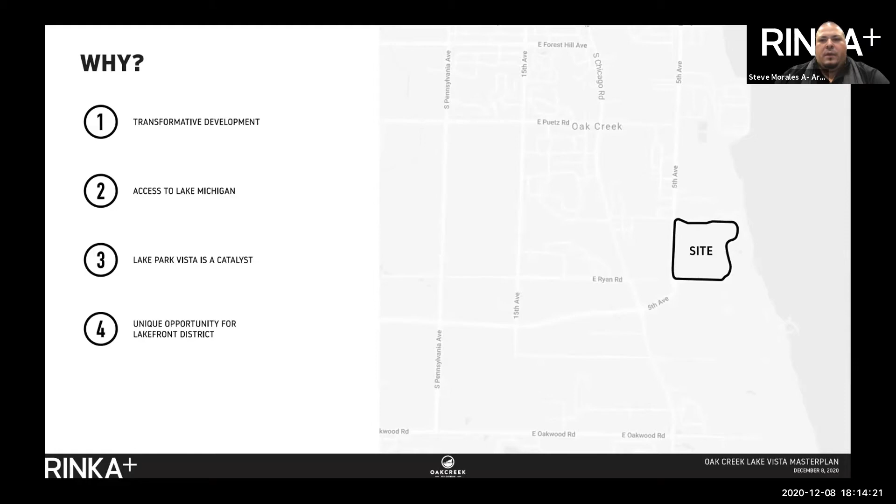So some of the initial questions we ask ourselves is why. And there are some very clear ideas here that it's a very transformative development. It certainly has amazing access to Lake Michigan, and the Lake Park Vista has always been a kind of catalytic project for the city. It's also a very unique opportunity for the lakefront area itself, and we're very excited to answer some of those why questions through design.

As we start to understand that opportunity, we really have to, as I mentioned, ground this project in research. Some of the most staggering research we found is that families in general have gotten a lot smaller, but the houses have gotten a lot bigger, and with that have become far more expensive. So one of the ideas here is understanding those barriers and how we start to solve some of them during design.

The research included four avenues of looking at things: studying other developments that have done similar things across the country, modern housing movements in general to understand the best approach toward residential development, future forward transportation to understand how the world works today from a transportation perspective and in the future, and understanding the value of amenities and recreational opportunities in this development.

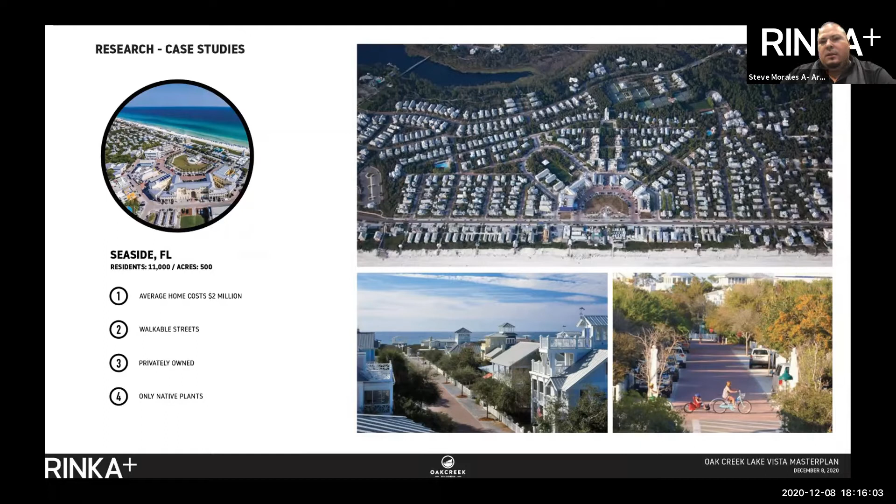When we look at some of these developments in the past, we look at case studies like Seaside, Florida, which started off with a great vision and mantra to try to develop an ideal community, but unfortunately has gone the way of not being very accessible. We learn from some of the mistakes that developments like this have had when trying to solve the problems we look for in new residential development.

Certainly Bainbridge Island developed in a very different way, focused on the idea of intergenerational living, going back to those community-focused ways of growing up in a neighborhood.

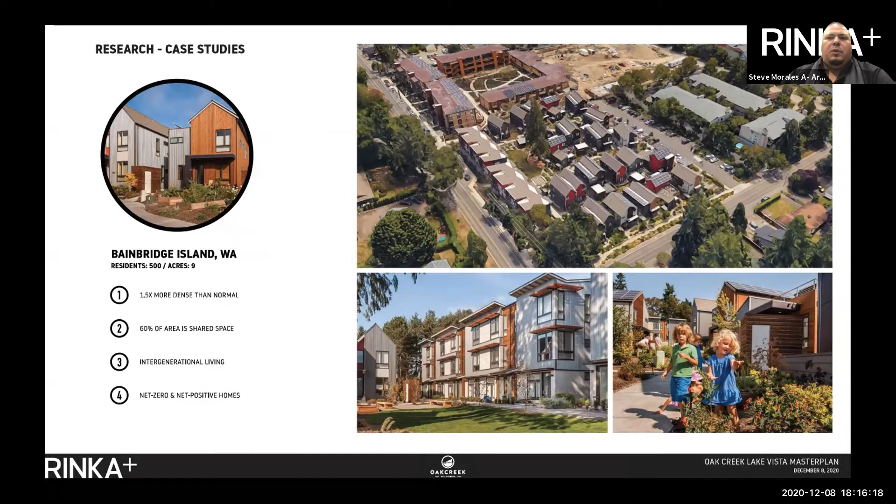We also look at large scale developments like Mueller in Austin, Texas, a former airport site with a lot of acreage, which took a different approach with more diverse housing typologies, and a focus on amenities with residents living less than 600 feet from green space, creating a highly functioning new development.

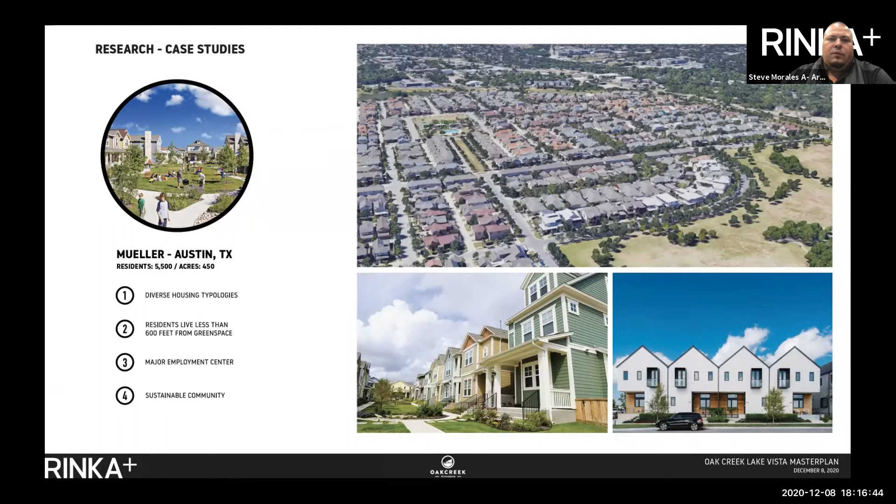Similar to that, Stapleton in Denver, another large industrial conversion site, again very similar in diverse housing typologies, extremely pedestrian friendly because of its scale, able to bring in mixed use components, and with more of those urban characteristics that really make a neighborhood feel connected.

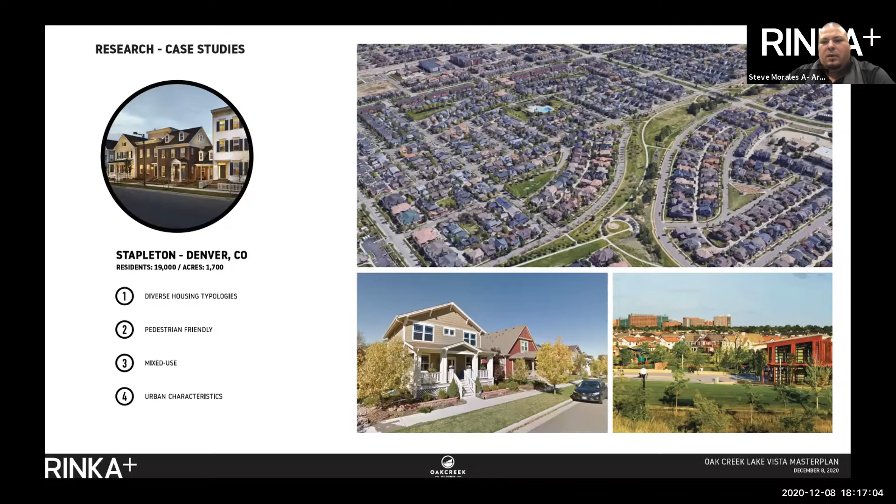Looking across all of those, you find a direction to increase the amount of green and amenity space in neighborhoods, focused on shared amenities and spaces between community members. It's very pedestrian focused, with a lot of diversity in housing typologies and offerings—it isn't one type of living situation. All of them start with diverse goals and common design elements that give the place a certain character.

Understanding some of the modern housing movements, looking at things like co-housing, prefabricated design, and smart homes, it's good to understand how modern families of different shapes and sizes start to live together in neighborhoods and understand the life cycle of families.

Prefabrication brings economy of scale to a construction typology, helping drive costs as low as possible to make the development as accessible as it can be. Smart home and sustainability ideas will help make these homes sustainable over the long term—true sustainability is really the long-lasting nature of neighborhoods and homes—providing benefits from a cost perspective, and convenience and technology for residents.

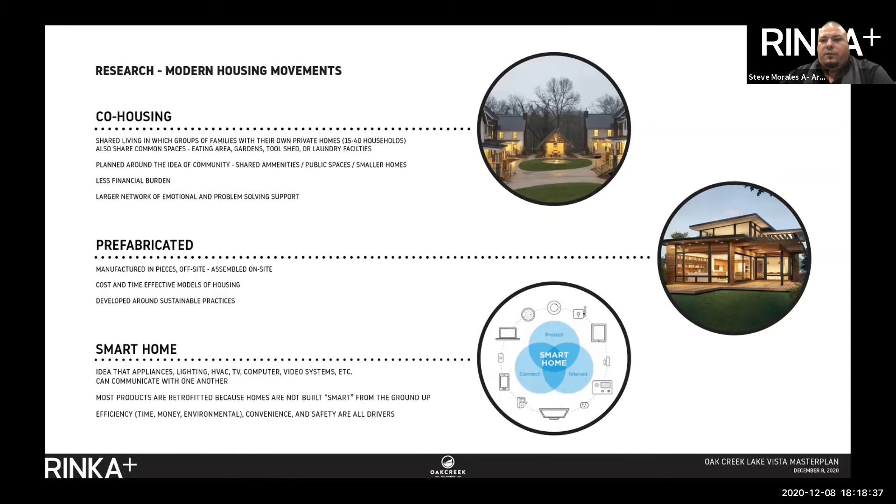Also thinking about transportation and the future of it—understanding walkability and how the current situation keeps us a very destinational environment in this part of the country. There are opportunities to increase pedestrian connectivity, put a focus on walkability and transit orientation, and bikeability aspects of development—a key focus for us to make sure we don't generate ideas that are very car dependent.

Also looking at amenities as well, looking across all those various case studies, understanding the amount of focus that's been placed on them became really a big driver for us here as we look to design to solve some of those problems.

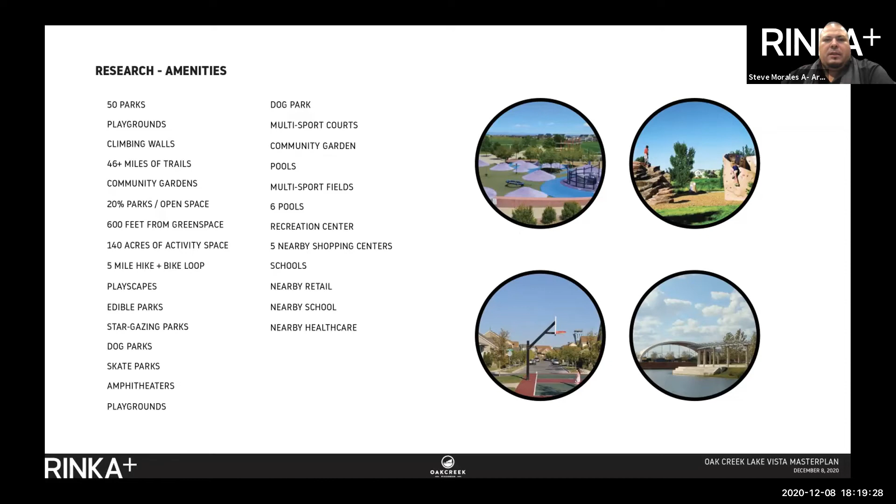In summary, the case studies really focused on a lot of shared spaces and interactive opportunities, certainly amenities, the modern housing movements, thinking about more of a community focus, creating opportunities for sustainability and efficiency, and decreasing financial burden when you look at economies of scale. Future forward transportation, certainly walkability, micromobility, and autonomous vehicles being considered in the future, something we can't ignore as we look ahead. And amenities and recreation, really understanding that for a community to be vibrant and become a neighborhood, it has to have access to green space, ample opportunities for diverse activities, intergenerational opportunities, and a focus on the whole community aspect.

We can't ignore the fact that there are a lot of experts in the world looking at how these get developed, and certainly the gold standard of that is Tracy Cross. We engaged a market study with all the various stakeholders involved, and the highlights are that it's really a great location. There can certainly be great absorption, so there's a need for more doors in the community, up to 660 per this report, with great absorption over time, and it supported the idea of various diverse housing typologies to make sure there was a good offering for residents who wanted to join your municipality as part of the development.

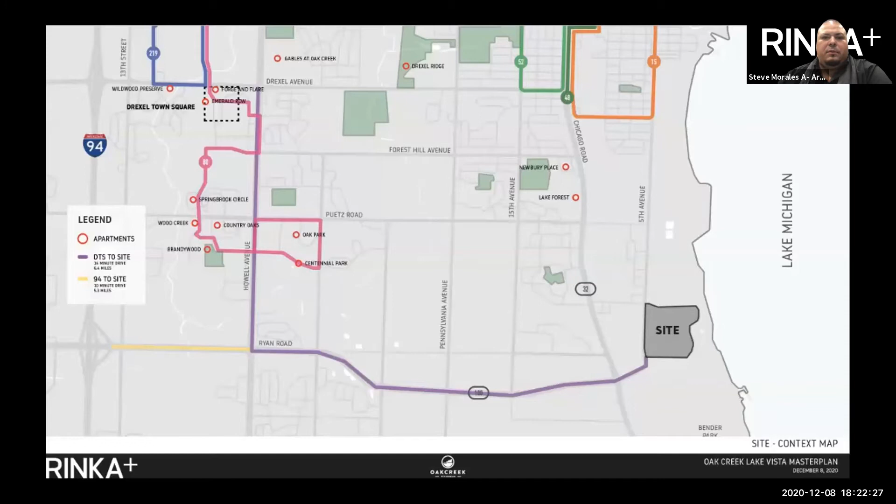Zooming in here a little bit, Lake Vista Park, obviously a great catalytic project that created a great opportunity for the city to have access to Lake Michigan directly. The areas in yellow really being the areas we're talking about today as part of the design solution we're proposing here today. If we look at the area in yellow, it's a fairly large site to start to dissect and get into.

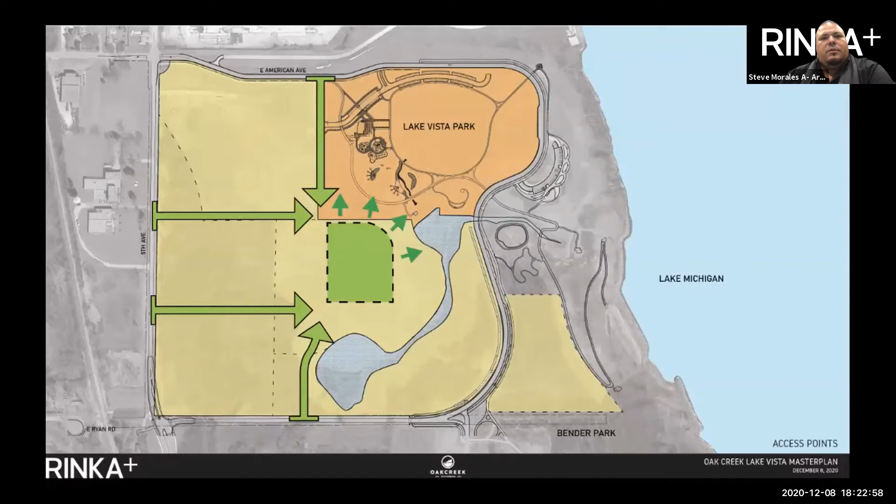Where we typically start is trying to create very logistical, feasible, and economic ways to get into the site that makes sense, creating some great major access points, understanding that getting to the center of the site and connecting to the center of Lake Vista Park is one of the goals, to understand how this could start to drive layout for the balance of the planning.

As we start to look at how we can subdivide those areas in between the major access points, we start to think through how residents could experience this neighborhood, walking out of your front door, being able to turn right or left and see those great vistas out over the park onto Lake Michigan, which helped us orient the blocks on the west side of this planning effort from west to east, as well as in the southeast portion of the bottom right corner, orienting some of those homes out to Lake Michigan.

What we then talk about is those amenity-rich opportunities: the connection, the pedestrian connectivity, the walkability, and the green lines that you see from this last slide here to this one start to show a very intentional connection throughout the site, through the neighborhoods themselves, and around to a bigger network of walking areas, trails, and paths that connect back over to Lake Vista Park, directly to Lake Michigan, to the bluff there, and to the perimeter, and eventual future extension of the Oak Leaf Trail up in the top left corner, and a variety of other methodologies to make it a very well-connected site.

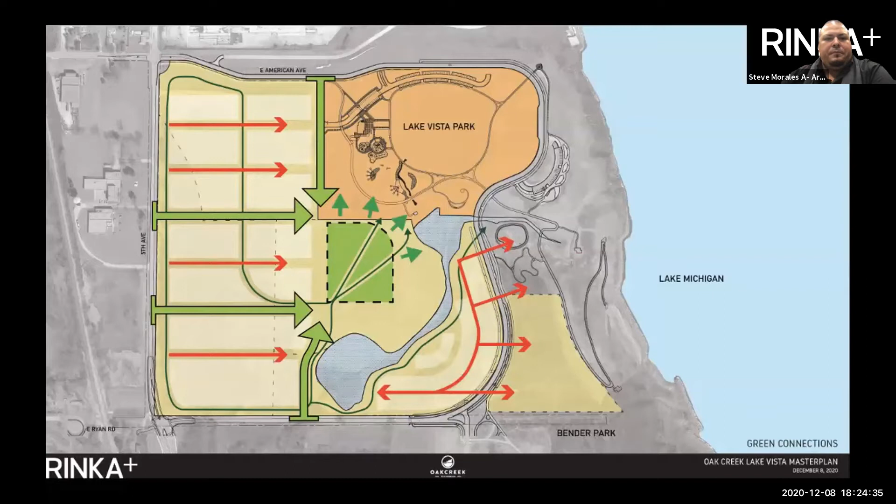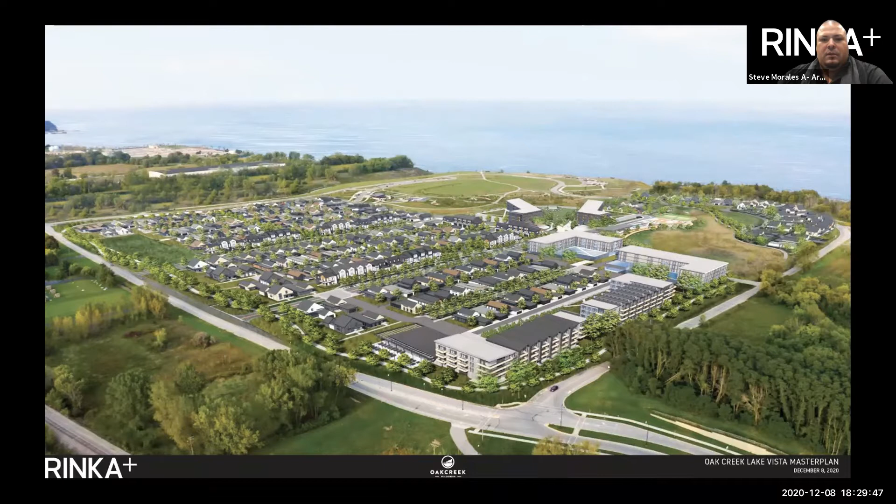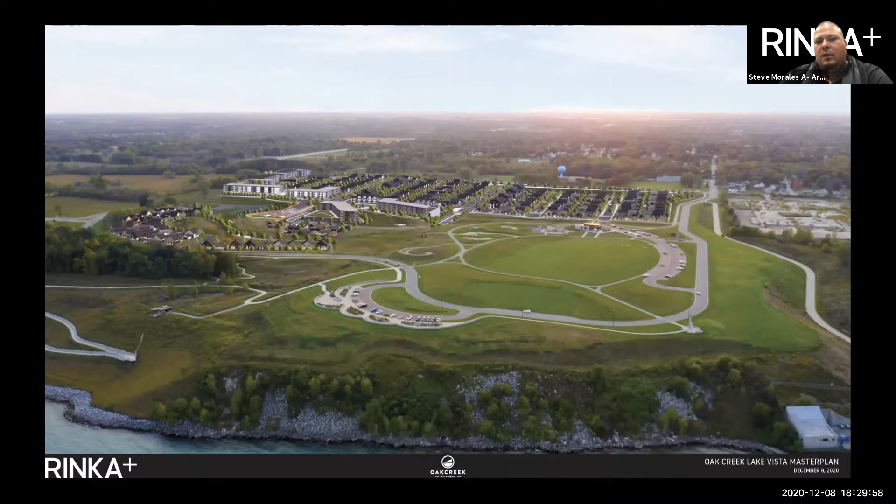With that, a few images that you will have seen in the animation I played, some overall shots here. Here we're in the southwest corner of the development site, over the top of the neighborhood. A view back over the waters of Lake Michigan, looking back towards the development with Lake Vista Park in the foreground. Some of the green spaces, the amenity-rich areas here that are within the development and accessible to the public as well as the residents.

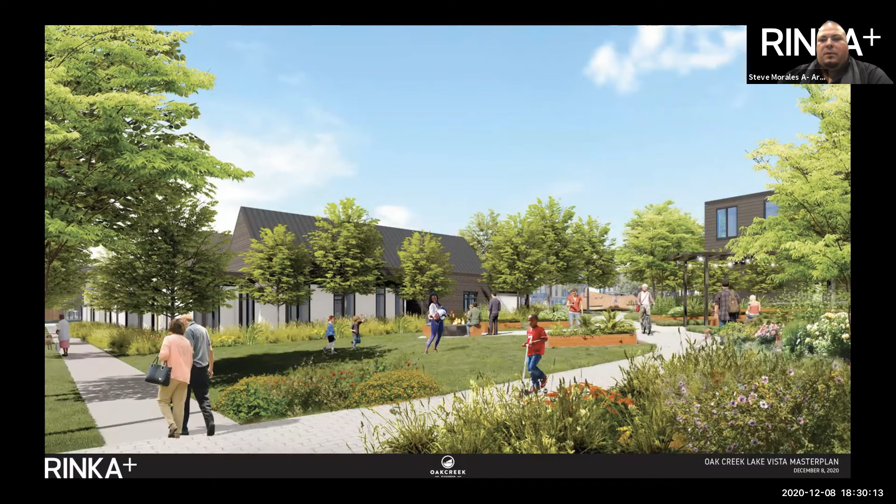And here an image of the spine that really runs through the center of the neighborhoods, showing some of those communal areas that will be accessible and available for the community to enjoy, gather, and be around each other.

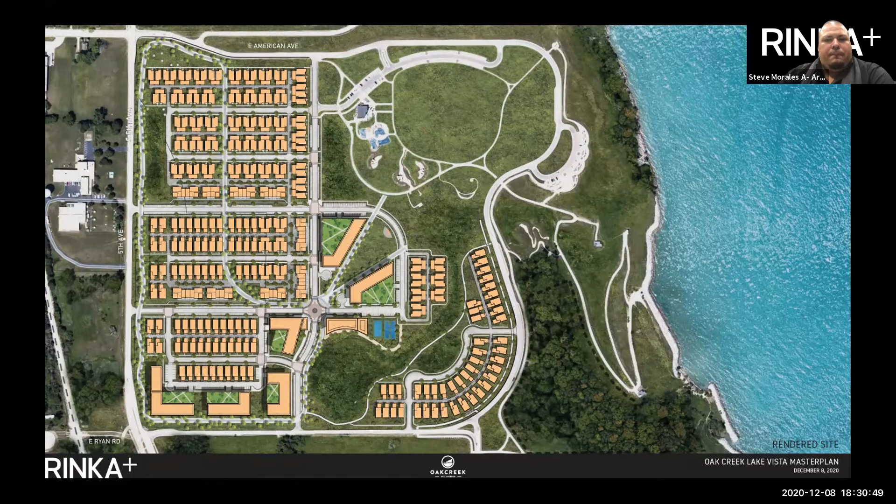And then lastly, the overall site plan that I showed earlier in the presentation, to get an overview here, as well as the previous breakdown of the site. I'll flip back to this image, and at this point, Larry, if you're on the call, if you could share with the group some of the great success story of the development, we'd be delighted.

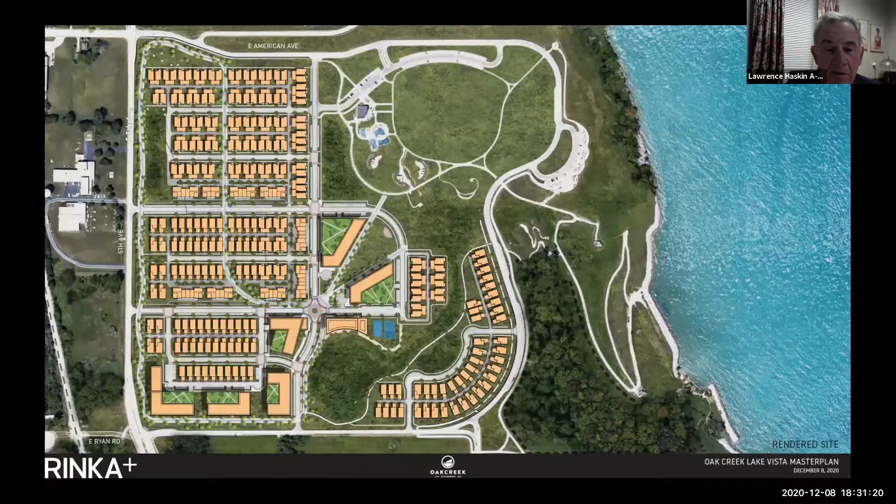Sure, I'd be happy to do that. Mayor, my name is Lawrence Haskin, 7300 South 13th Street, Oak Creek. I served as the city attorney for Oak Creek from 1985 to 2015, and have been working with Andrew and his team over the last several years on all matters with regard to the lakefront, particularly this development.

Let me start out by saying the city's really enjoyed a tremendous partnership with F Street, with Scott Lurie, and with Rinka Architects. We've done a lot of work with Rinka in the past, particularly on Drexel Town Square, and they've had a tremendous impact on what's happened here over the last decade in the city of Oak Creek.

This is obviously, as you can see, a transformational project. It's going to be a game changer for the city and for the lakefront. But it's even more compelling when you consider the history of this property. It's really a tremendous story of taking previously contaminated property and, through partnership with the DNR and the previous property owners, and now with F Street and with Rinka, turning it into a tremendous redevelopment.

So just historically, over 100 years ago, Newport Chemical built a huge chemical complex, a number of different factory buildings, on the site of what is now Lake Vista Park. They built and operated that at a time when there was no DNR and no EPA. So whatever the byproducts were from the chemical operations just went back into the land, whether that was barrels or residue from the manufacturing operations. So there was no environmental oversight.

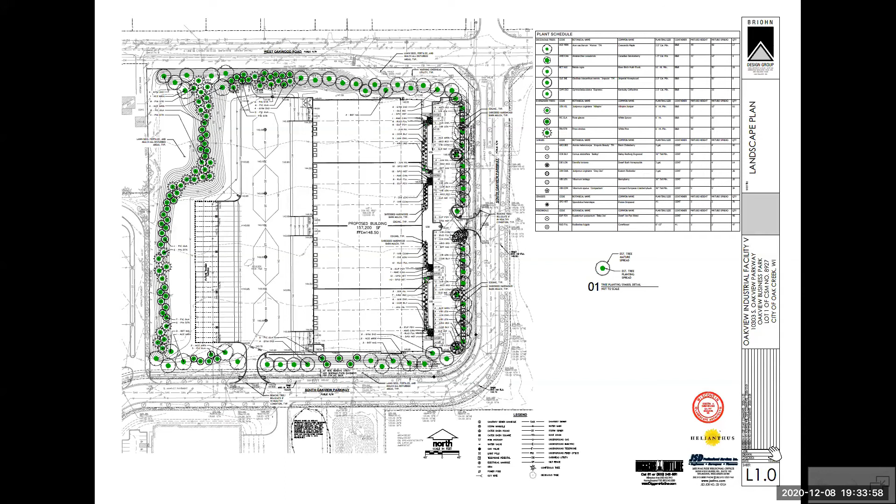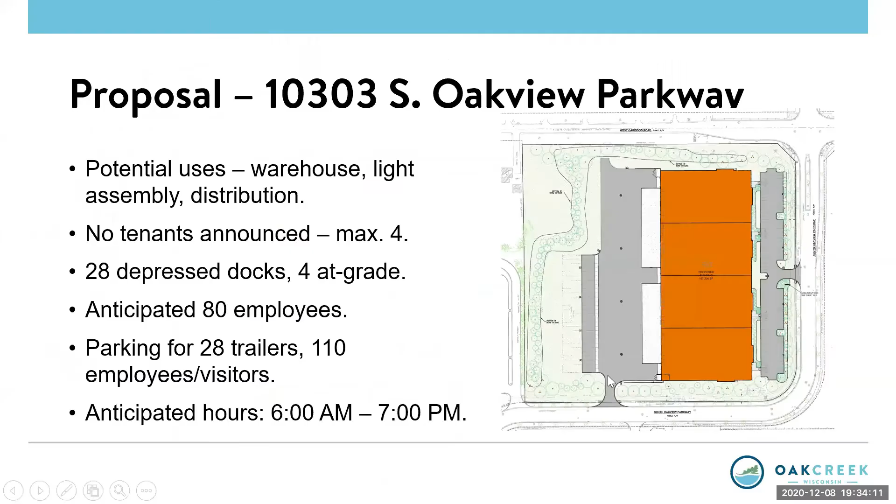Okay, with that we'll look for a motion, please. Seifert moves that the Planning Commission recommends that the Common Council adopt the conditions and restrictions as part of the conditional use permit for freight yard, freight terminal, transshipment depot facility within the multi-tenant building on the property at 10303 South Oakview Parkway.

Loreck seconds. Roll call. Hannah, aye. Sullivan, aye. Grillo, aye. Lorik, aye. Kavich, aye. Guzikowski, aye. Oldani, aye. Seifert, aye. Chandler, aye. Great.

Thank you very much to the Dickmans. Thank you for working with the residents. Residents, thank you for speaking up. We always need that input, and it's not always the easiest conversation, but it is helpful. So thank you very much.

Item 5C is a request for a rezone for the property at 7140 South 13th from RS3 single family residential to B4 highway business, with no change to the floodway.

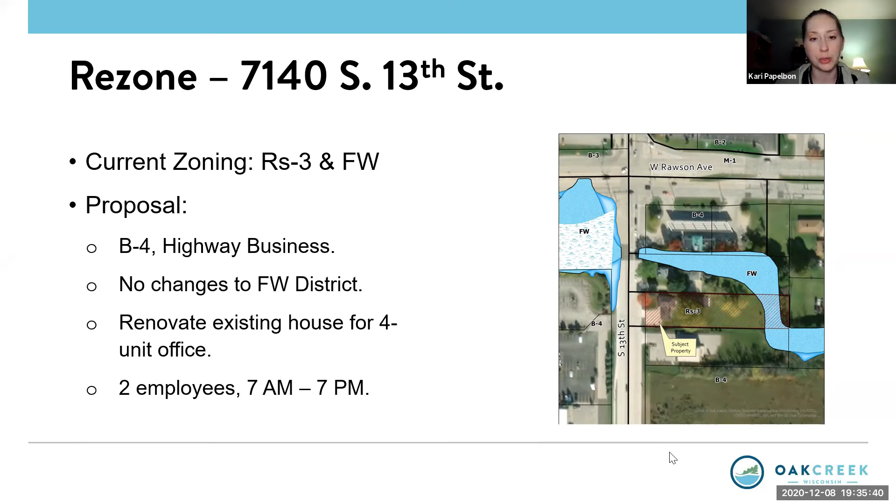Kari: Thank you, Mr. Mayor. The request is to rezone the property, and there are no changes proposed to the floodway, so thank you for mentioning it. There is an existing home on that property, and while the request is just for a rezone, it doesn't have anything to do with the use itself. There are some details provided by the applicant for what the proposal would include for reuse of the property. They want to renovate the existing home for a 4-unit office building. Right now they have 2 employees slated to work 7 a.m. to 7 p.m. on the property.

If we turn to the comprehensive plan and what it says for this area, you can see the majority of this area is in red, which is for commercial use. This is one of the last remaining residential properties anticipated for future commercial use in this area, so rezoning the property is in line with the comprehensive plan. As you can see, the parcels in the area are also zoned for commercial: B4 with a conditional use, B4, and a PUD. In the extended area, the zoning goes to B3 and B2 to the north, M1 to the east, B3 and I1 to the south-southwest. So the majority of properties in this area are slated to be commercial, which is in keeping with the area as well as the comprehensive plan.

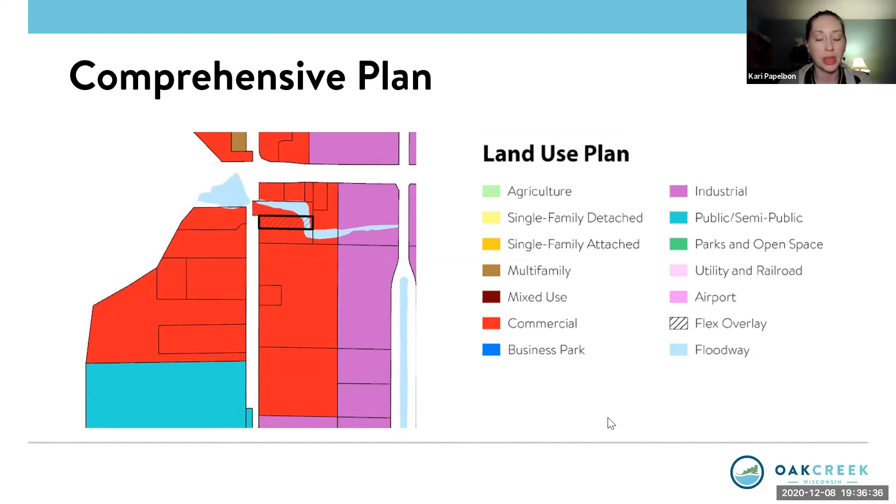So even though, this is just for the rezone, rezoning does not preclude the applicant from obtaining any future reviews that may be required based on the specifics of the use of the property, including site and building plan review for any change to the property itself or the building exterior, sign permits, and things of that nature. So with that, there is a suggested motion for approval on the screen.

Mr. Mayor, thank you, Kari. Kevin, is there a resident wishing to weigh in or provide a comment? There is no one on for this item.

Okay, Commissioners, we'll start with Commissioner Chandler, any questions? No questions, thank you. Fred? No comments. Don? No comments. Chris? No comments for me. Greg? No, thank you, no comments. Dawn? Nothing for me. Matt? Nothing. Christine, anything? Nothing here. I have nothing either, so we will go to motion, please.

Oldani moves that the Plan Commission recommends to the Common Council that the property at 7140 South 13th Street be rezoned from RS3 Single Family Residential to B4 Highway Business, with no change to the floodway district, after a public hearing. Seifert seconds. Roll call.

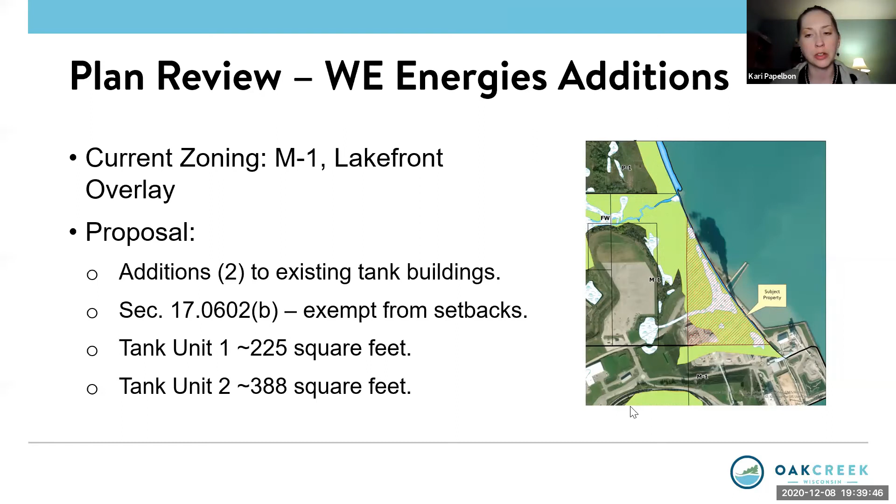The proposal is for two additions to the existing tank buildings. Because this is a utility, they are exempt from setback requirements, which is why there's nothing listed here. Tank unit 1's addition is about 225 square feet, and tank unit 2 is about 388 square feet. We'll get into what those look like in just a moment.

These are the locations. As you can see, it's on the east side of the facility, nothing that'll be viewed from any surrounding properties. You probably won't even notice it if you're out on the lake. The insulated metal panels chosen for the building will match as closely as possible in look and color to the existing facility.

The use of metal panels requires a 3/4 majority approval of the Plan Commission because it's not recommended or allowed as a primary exterior building material in code. But since this is an addition, the Plan Commission does have the authority to make that exception. Due to the location and nature of the additions, landscape plans are not required for this proposal.

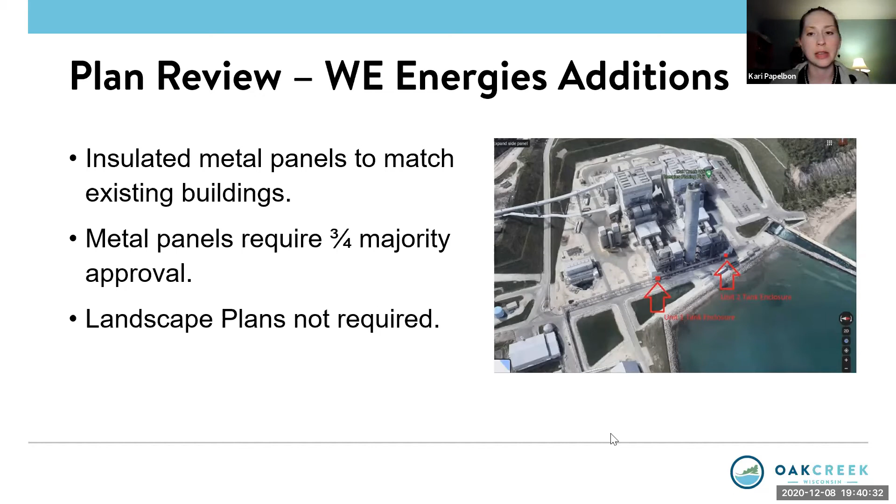Here are the existing facilities with the red outlines where the buildings will go. The elevations show pretty much just a little bump out, which is what the tank facility will look like. You probably won't even notice it, and most people won't ever be in this area to notice it.

Each of the additions will be about 21 feet in height, again on the east side of these buildings, nothing that can be seen from the neighbors. So if there are any questions, we can certainly try to answer those, but there is a suggested motion for approval on the screen for Plan Commission consideration.

Thank you, Kari. Kevin, is there a representative from We Energies that would like to speak? Yep, we have a couple. Rob Steer, the administrator for this project, is raising his hand. Rob, you should be able to speak. We'll need your name and address for the record.

This is Jim Filer with Anderson Ashton. I believe Scott Leonard from the power plant is on, if there's any questions as to the use of the tank building. As explained, metal panels to match — it's a metal roof, small metal building addition for process for the power plant, to house a tank. It's generation station 1 and 2 that need the identical facility.

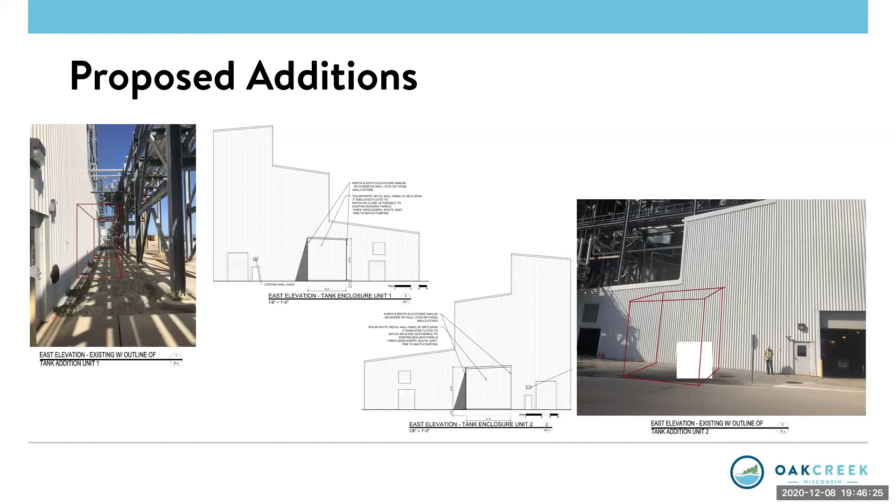Seifert moves that the Planning Commission approves the site and building plan submitted by Pete Segalis, We Energies, for the property at 4801 East Oakwood Road.

Hannah, okay, we have so many. I think Hannah's second, that's what I heard.

But okay, roll call. Hannah, aye. Sullivan, aye. Grillo, aye. Lorik, aye. Gavich, aye. Guzekowski, aye. Oldani, aye. Seifert, aye. Chandler, aye. Okay, thank you very much, guys. Appreciate it.

Item E, Plan Unit Development Amendment. Review a request submitted by John Schluter, Frontline Commercial Real Estate Development, to amend the existing plan unit development to remove the property at 9141 South 13th. Kari?

Thank you, Mr. Mayor. That's actually the entirety of the request. Current zoning is B4 PUD, and there is an existing PUD that affects this property as well as the two properties to the south. A little bit of history for those who recall, whenever we were talking about the comprehensive plan amendment for this property, the PUD was established in Ordinance 805 in 1979 for those three properties. It was last amended January of this year to allow hotels and restaurants on the property at 9315, and to also bring that PUD more in line with current code requirements.

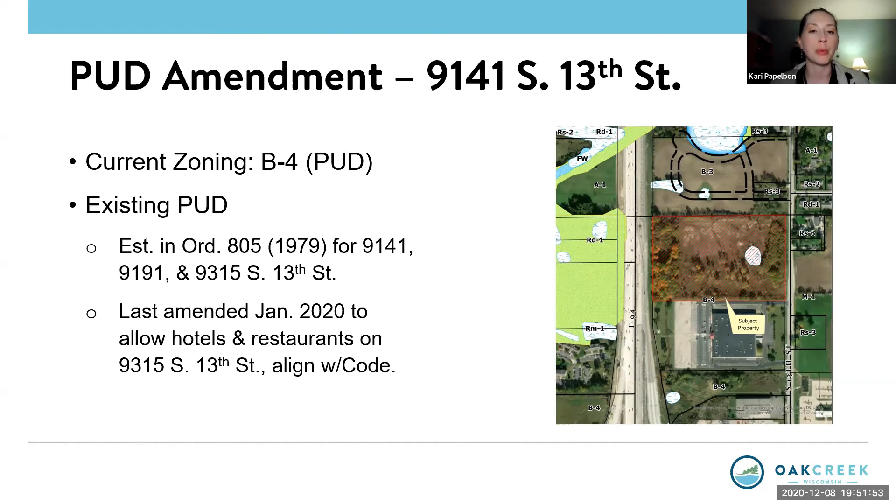So 9315 is the one that was amended to allow hotels and restaurants. But the entire PUD is commercial in nature, it doesn't allow for manufacturing facilities, which is why the request to remove this property from the PUD is before the Plan Commission.

With that, I have no other questions. Thank you, Christine. I do not have any questions myself either, so if there's no further comments, motion.

He moves that Guzikowski makes a motion that the Plan Commission recommends that the Common Council approve the planned unit development amendment, removing the property at 9141 South 13th Street after a public hearing.

Loreck seconds. Roll call. Hannah, aye. Sullivan, aye. Grillo, aye. Lorik, aye. Kavich, aye.

Guzikowski, aye. Sleeper, aye. Chandler, aye. Okay, and that will get us to the connected rezone, as Kari mentioned, and that's a review submitted by John Schluter, Frontline Commercial Real Estate, to rezone that property at 9141 South 13th from B4 Highway Business to M1 Manufacturing.

Kari? Thank you, Mr. Mayor. So again, we are talking about this property, rezoning it to allow for a future multi-tenant industrial building on the property, allowing that in an M1 district.

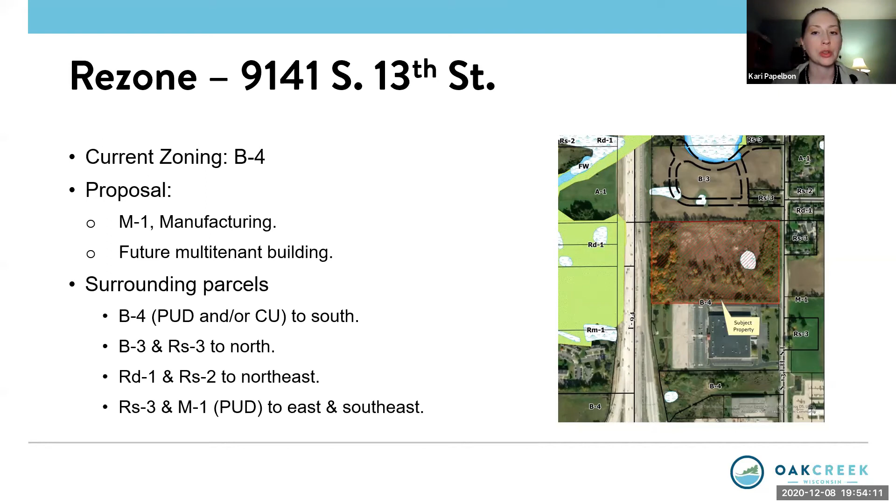So we mentioned that the comprehensive plan was amended to business park in November of this year, and this is a reminder of what the comprehensive plan calls for in terms of business park type uses and developments. Now, the future development, of course, we mentioned reviews would be required for anything that happens on this property, and would allow for permitted uses in the M1 district.

In this case, the proposal would include such things as a manufacturing, fabric manufacturing facility and food distribution. Primary operating hours, even though not part of the rezone, at this point are anticipated to be 7 a.m. to 5:30, although distribution would be outside of those hours and likely 24/7 depending on the tenant needs. There might be a small scale retail or wholesale component as part of one of these uses, probably the manufacturing facility would have that, not sure if any of the other tenant spaces would need it, but it would be allowed in the M1 district.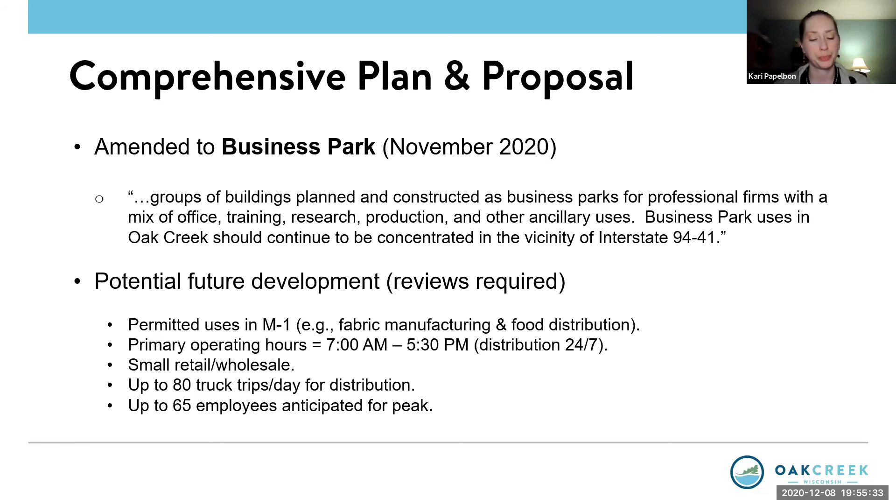Right now, it's anticipated that up to 80 truck trips a day would be seen on the property for the distribution component, and all told, about 65 employees at peak would be anticipated based on these two use categories. That is the information that we have pertaining to the rezone. There is a suggested motion on the screen for commission consideration for approval.

Mr. Mayor. Thank you, Kari. The applicant is available if there are questions. We did have a neighbor sign up as well. Please let the neighbor go. All right, Tom and Denise Abler, you should be able to speak.

Hi, this is Denise Abler at 1230 West York Street. We have been following this since the first request for the rezoning, and I guess I'm a little confused on what is really being proposed and what's going to happen with that property. I know I have spoken not directly to John, but via email, and I did contact our alderman on some concerns about traffic and that type of thing. It's hard to approve of this when you really don't know what's going to go into that property and what it's going to look like. So could John help us out with what he's proposing or planning?

Fair enough, I think that's a fair question. John, are you with us? Can you shed some light and kind of clear that up for Denise? Absolutely. Tom and Denise, good to be talking to you again, and the whole commission. The building will be masonry and glass construction.

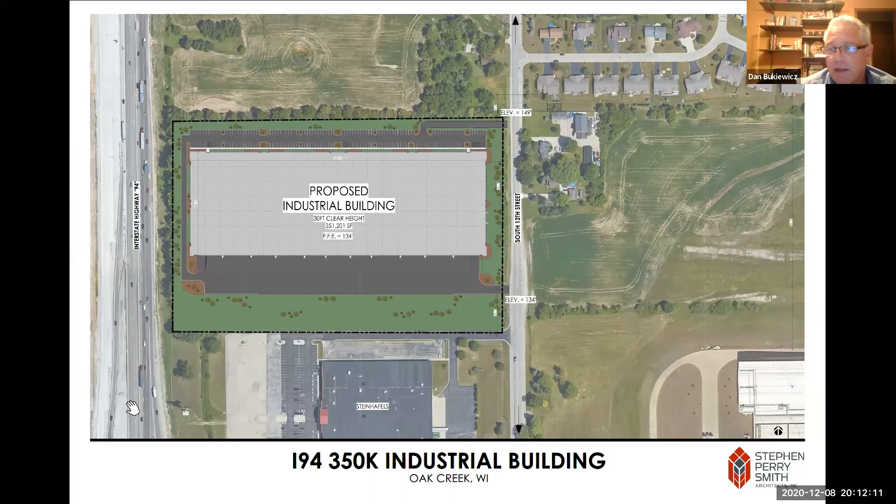Okay, I have no further questions. Thanks, okay Tom. Okay, with that, Denise, if something pops in your head, just give us a jingle. I'll see if the commissioners got any questions, comments. Sure, I appreciate that, thank you.

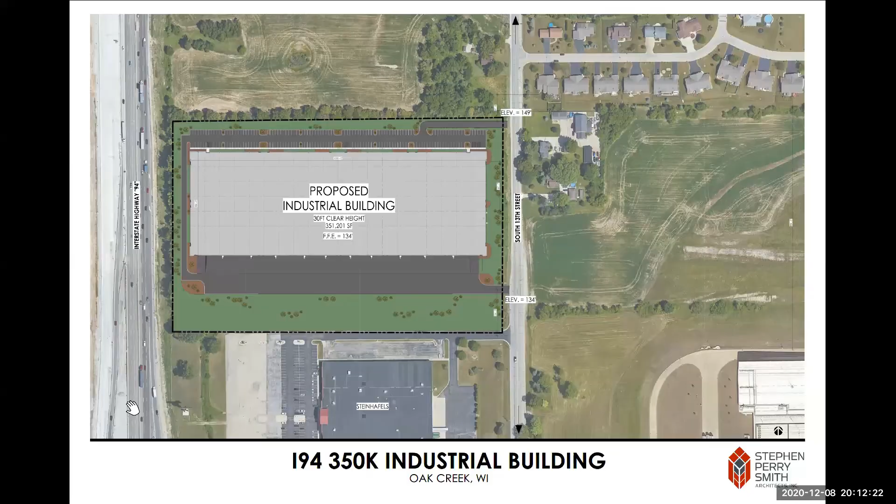Christine, anything? No, nothing here. Thank you, okay thank you. Matt? Nothing in regards to the rezoning, no. Okay, Dawn? Nothing for me. Greg? No, nothing at this time. Thank you, Chris? No, I'm set at this point. Thanks, okay. Don? No questions or comments.

Fred? No comments. Chauncey? I do have a question for the applicant and possibly Kari. Based on the description of the type of manufacturing that will occur here, can you provide more information on whether this should be a light manufacturing rezone versus a manufacturing rezone?

Chauncey, I can kind of answer that. The zoning district allows for this type of use in the M1 district. We did look at LM1 as a consideration, but it does not offer the range of uses that would be seen in this particular development.

Okay, thanks Kari. And just for clarity, a quick question for the applicant: so you're going to be processing or manufacturing fabric, is this correct? That's correct. We convert the fabric from rolls of fabric to what's called Keder, K-E-D-E-R. Nobody's ever heard of it, but we process the fabric into Keder, which is actually a fabric retention device. It's used in tents, it's used in signage for stores. Every Home Depot in the country utilizes our product to hold their signs in place. If that explains it at all.

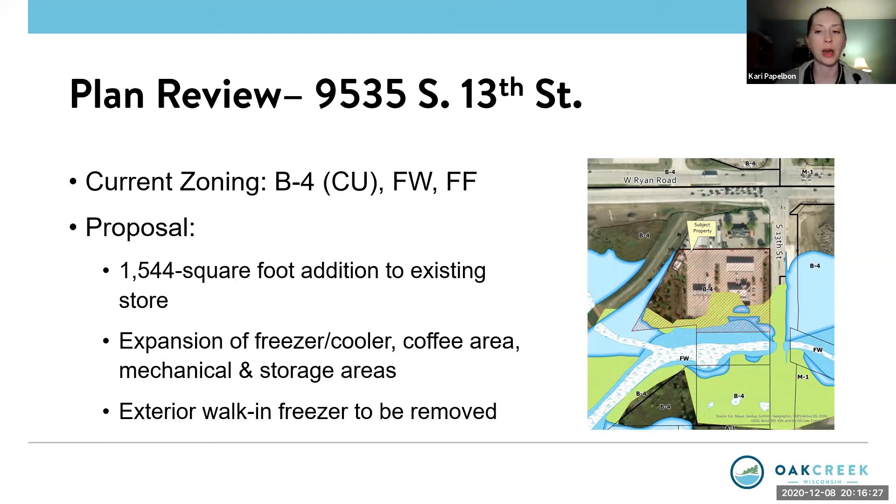These are the existing conditions for the property. You'll see that the area we are going to be discussing is right behind this fenced area. If you can see my cursor, that is exactly the area where this addition will be placed.

The areas that will be affected, if the bike rack and those such things being affected are going to be removed, in some cases they will be relocated.

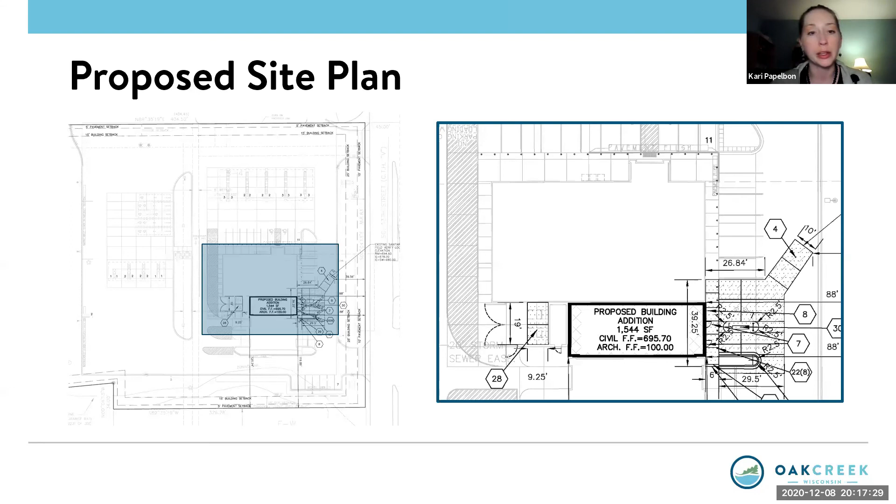Setbacks and dimensional requirements for the addition are of course met with this proposal. The interior renovations, while not part of this review, do inform how that addition is going to affect the remainder of the store. As I mentioned, the fence, the bollards, the vacuum island, and a bike rack will be removed, relocated where possible.

The landscaping requirements are not actually applicable to this particular addition. However, they are proposing for an existing concrete curb island to be changed to a landscape island. They are going to be putting in 3 additional shrubs. So thank you for doing that.

Appreciate that. And as I previously mentioned, no changes to the number of parking stalls, no changes to the pumps, canopy, lighting, signs, or hours of operation, or anything else having to do with this particular property.

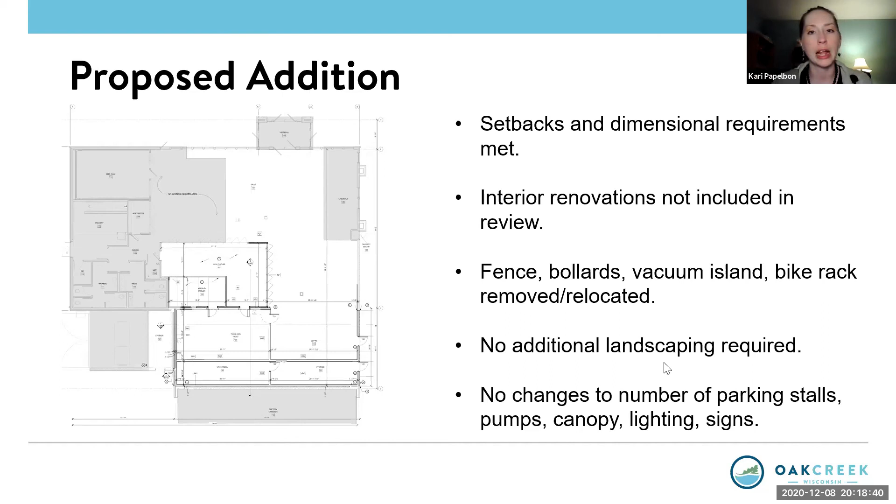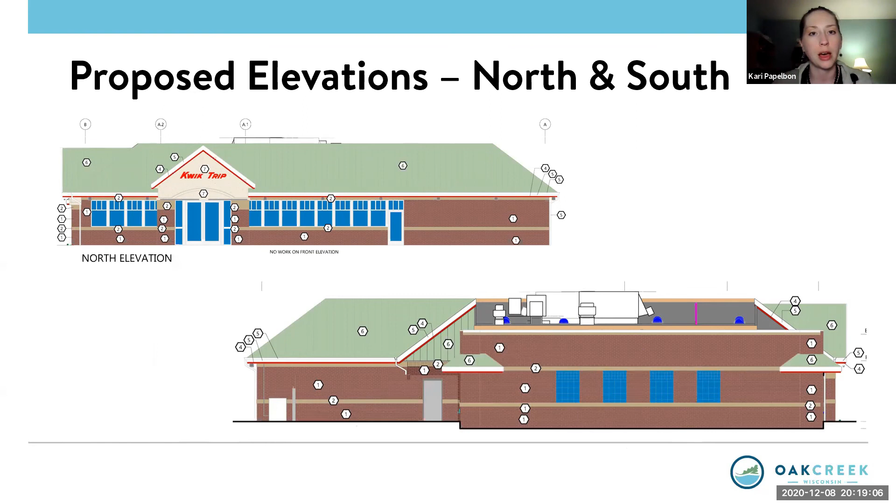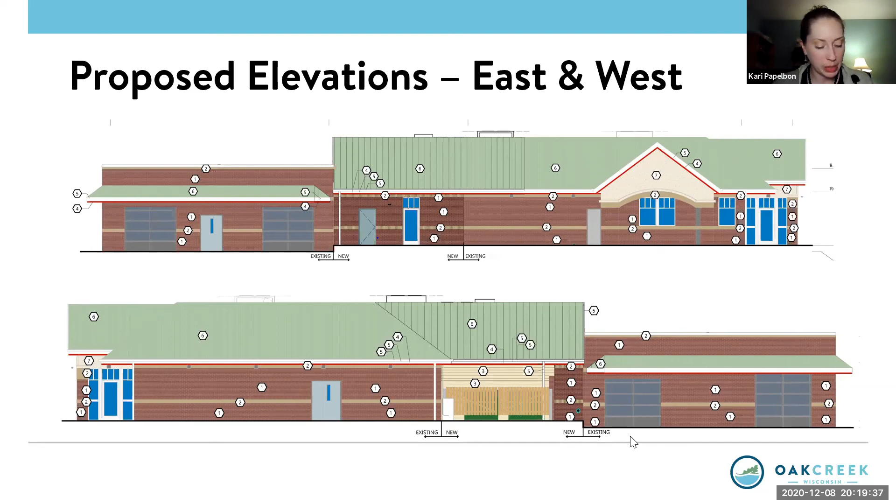Again, the RTUs will be screened by the roof element. The building materials are on the screen right now. These are going to match what is existing for the building.

There is a requirement per code that brick be the minimum modular dimension, that 4-inch thickness we are talking about. If that is something that does not match currently and cannot be accommodated, the Plan Commission does have the authority to change that for an addition to meet what is existing. We've not received any information as to the dimensions for the brick. There is a suggested condition of approval in the motion that the brick would be that standard 4-inch modular.

There is one more item to discuss, and that is with regard to the existing conditional use permit on the property. Plan commissioners may note that the narrative request included as part of the packet mentioned outdoor storage. Outdoor storage was not specifically approved by that 2009 conditional use permit, and every outdoor storage request in the city does require conditional use approval specifically.

The applicant does have the opportunity or option to request a separate review for outdoor storage, but that would be something to talk about in the future. That would be a conditional use permit amendment. No storage or display of merchandise would be allowed by the pumps, however, and that's for maneuverability and also for fire department considerations. That's a hazard, and it's a safety hazard.

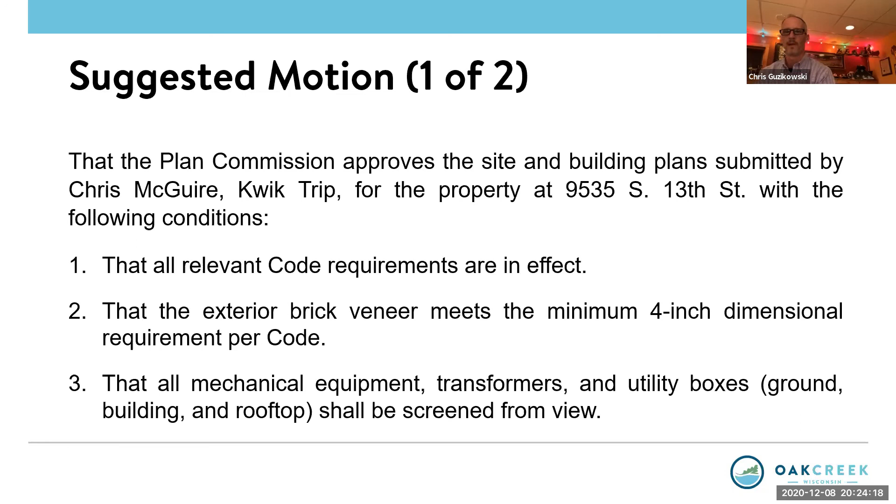Guzikowski makes a motion that the Plan Commission approves site and building plans submitted by Chris McGuire, Kwik Trip, for the property at 9535 South 13th Street with the following conditions: one, that all relevant code requirements are in effect; two, that the exterior brick veneer meets the minimum 4-inch dimensional requirement per code; three, that all mechanical equipment, transformers, and utility boxes, ground, building, and rooftop shall be screened from view.

And four, that no outdoor storage is approved as a part of this plan. All requests for the outdoor storage and display of retail merchandise shall require an amendment to the existing conditional use permit in conformance with the applicable code requirements. Five, that all detailed revised plans are submitted in digital format to the Department of Community Development prior to submission of permit applications.

Seifert seconds. Roll call. Hannah, aye. Sullivan, aye. Grillo, aye. Lorick, aye. Kavich, aye. Guzikowski, aye. Lonnie, aye. Seifert, aye. Chandler, aye. Okay, there you have it.

And that'll get us to 5H, and that is our last item, actually. It's a temporary use permit, and this is a review to request a temporary use permit submitted by Aaron Tesh, Adult Day Services of Southeast Wisconsin, for temporary operation of an adult daycare facility within a portion of the Oak Creek Community Center located at 8580 South Howell Avenue.

Kari? Thank you, Mr. Mayor. This is a temporary use permit request, and it's a little bit of an interesting situation because it's within an existing building. We had to take a look at this a little bit more closely, and determined that the I-1 zoning district, which is where the community center currently resides, does not allow for this particular type of use as an allowed use. So a temporary use is required.

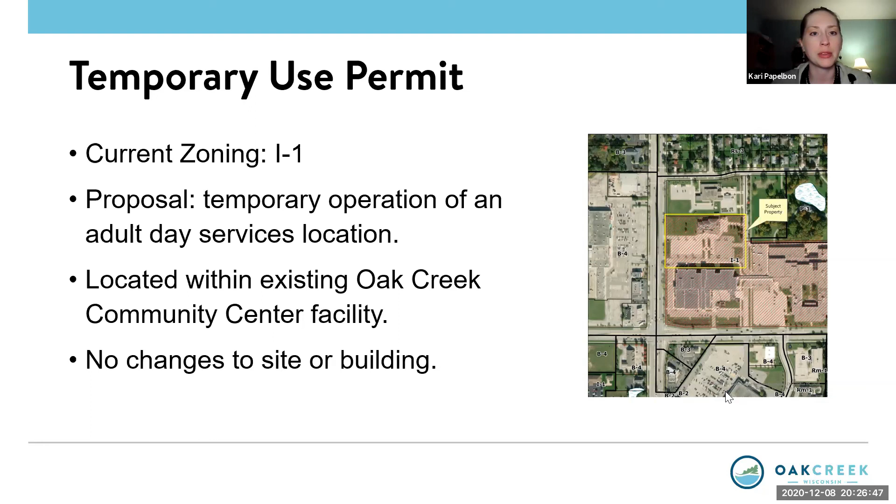No medical lodging or meal services are provided. This is purely for recreational and cultural activities for adults with developmental needs.

Up to 25 participants are anticipated to be at the facility at any given time, with 4 to 5 employees at peak. Hours of operation are between 7:30 a.m. and 3:30 p.m.

Participants are dropped off at the facility, either by caregivers or by transportation companies. However, Adult Day Services of Southeast Wisconsin does have 2 passenger vehicles right now that can provide accommodations if necessary, and they do have other resources if necessary in the future.

Based on this information, the parking at the Oak Creek Community Center appears to be sufficient for the proposal, in addition to being able to utilize the remainder of the facility as anticipated.

There's no definitive timeline, as you can imagine, for reopening that Grant Center facility. It's all based on how this plays out. So the temporary lease that the applicant has entered into with the Oak Creek Community Center is for a minimum of 3 months, beginning in January, with an option up to 6.

With that in mind, there are conditions of approval in the suggested motion that recognize the extent of the lease term, providing a recommendation for the temporary use permit to expire June 30th. That's for council or commission discussion, but there is a suggested motion for approval.

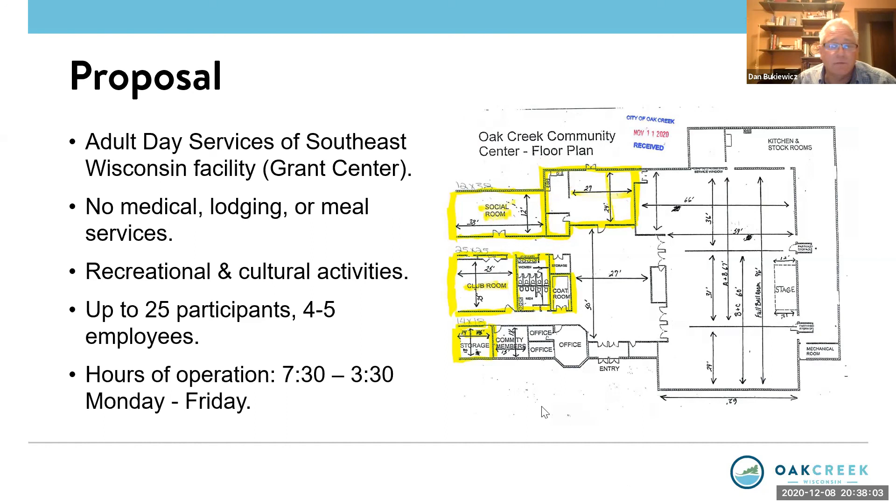Again, I applaud the work that they're doing at Adult Daycare Services and the community center, and it's just a great example. We've said this early on in the pandemic, we're all in it together, and everybody's affected in many ways, differently, and this is really just at the heart of what we are. We're a community. I'm just so glad the partnership worked out and that services can be provided to these individuals that, in all this commotion, things get left behind.

So before I call for a motion, I'll just ask Assistant Chief Havey if there are any concerns from fire, or if you need to get together with adult daycare to speak with them. Anything, Mike? No, actually we're very supportive of community outreach like this. Our EMS services are supportive of all residents and visitors alike. We're a little bit familiar with some of the care facilities in the community, so this is something we'll support and assist with as we can. I think it's a great project.

Great, thank you, Chief. That's it for me. I don't have anything else beyond that. So motion, please.

Lorick moves that the Plan Commission approve the temporary use permit request submitted by Aaron Tesh Adult Day Services of Southeast Wisconsin for the operation of an adult day services location on the property of 8580 South Howell Avenue, parcel address 340 East Puetz Road, with the following conditions: all relevant code requirements remain in effect; all activities shall be located within the building; hours of operation are between 7:30 a.m. and 3:30 p.m. Monday through Friday, with no overnight activities; and the temporary use permit shall expire June 30th, 2021.